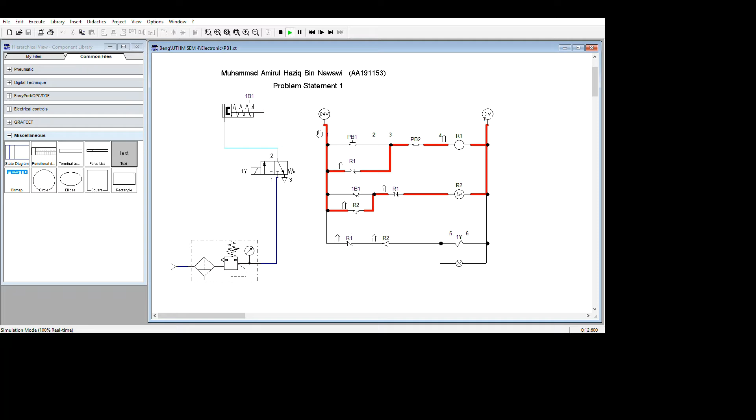So I run the simulation. When I push the push button, R1 energizes, so the lamp is on. After 4 seconds, the lamp will turn off, and the cylinder moves to its initial position. That's all for me. Thank you.

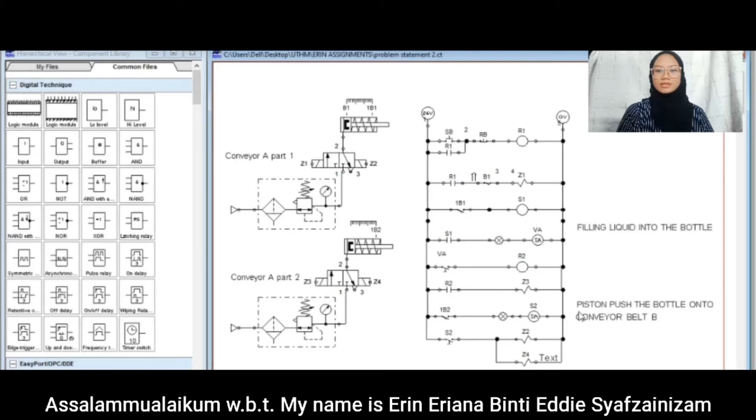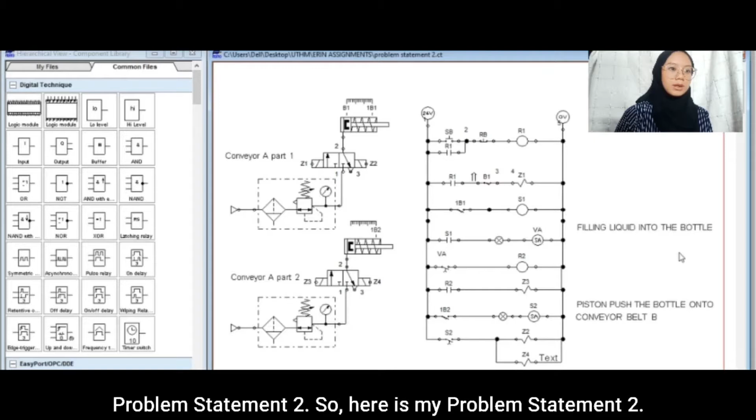So as you can see, here's my problem statement 2. There are two vertical rails, one is input and another one is output. The input is 24 volt while the output is 0 volt. There are 10 rungs, numbered 1 through 10.

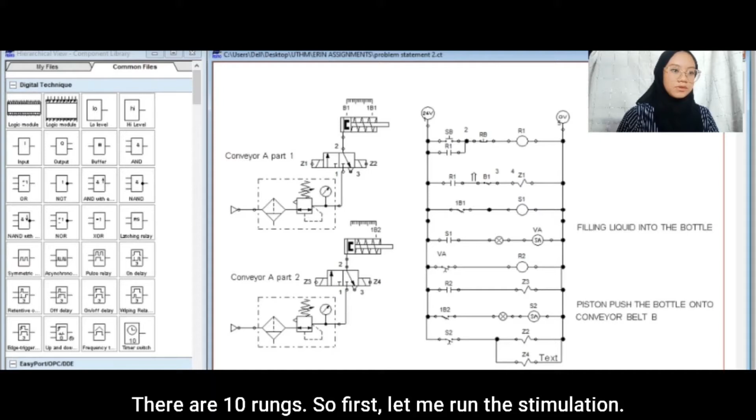So first, let me run my simulation. When we press the start button, the circuit of the conveyor belt will energize until the bottle stops at the filling station.

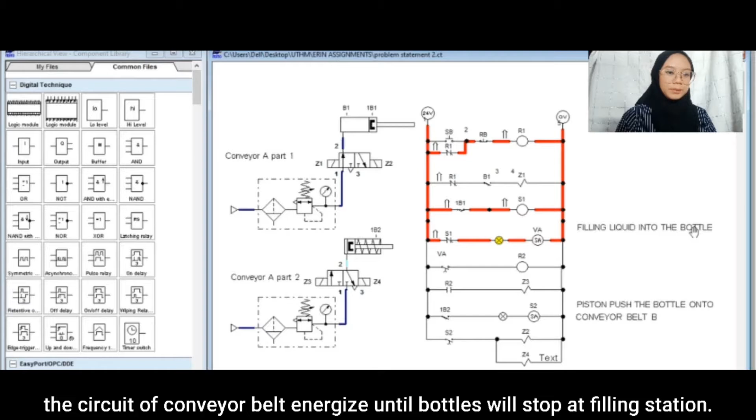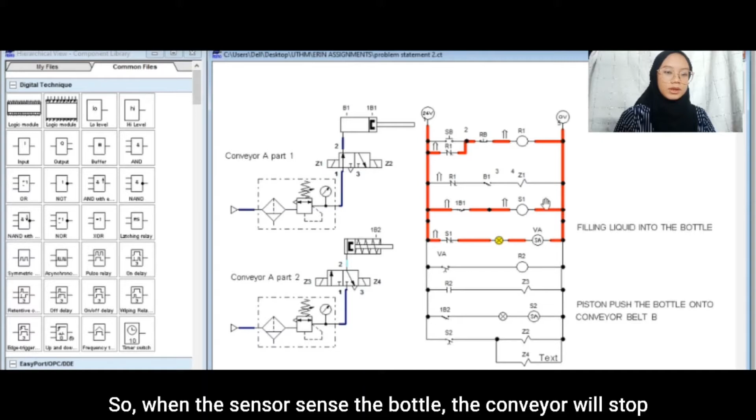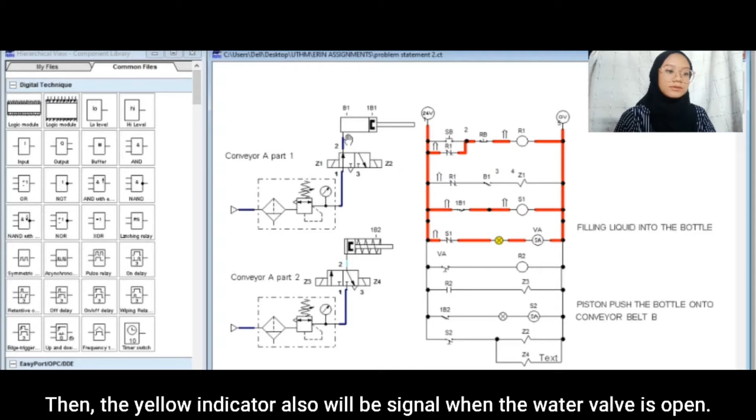When the sensor senses the bottle, the conveyor will stop and the water valve will open for 2 seconds for filling the liquid into the bottle. The yellow indicator will also signal when the water valve is open.

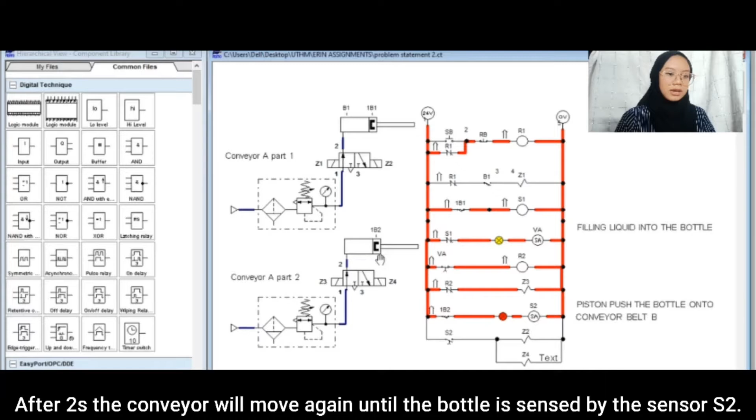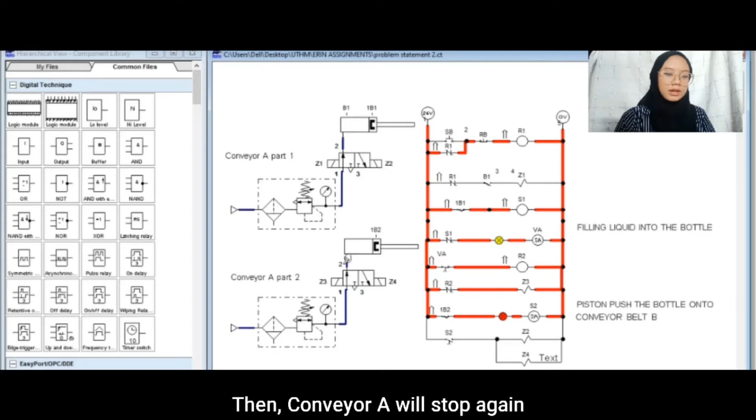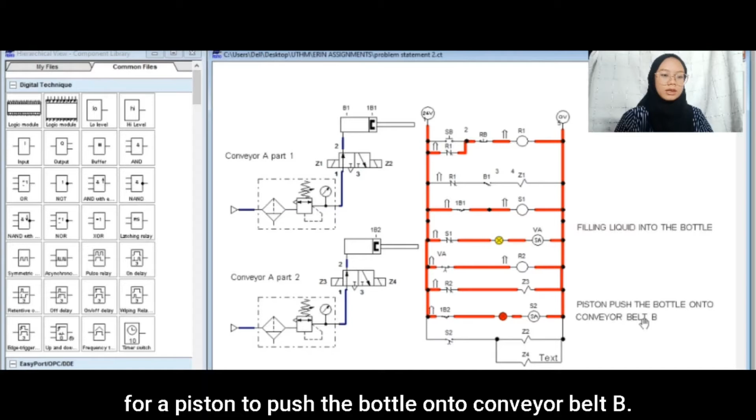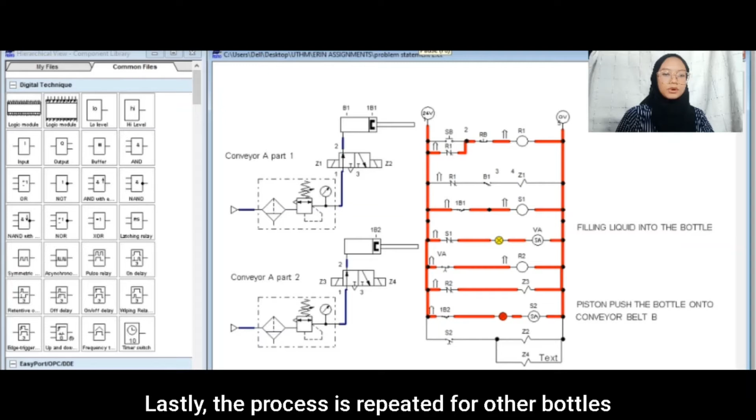Then the process is repeated. Lastly, the process is repeated for another bottle until the reset or stop switch button is pressed, which is this one. Okay, so that's all from me. Thank you.

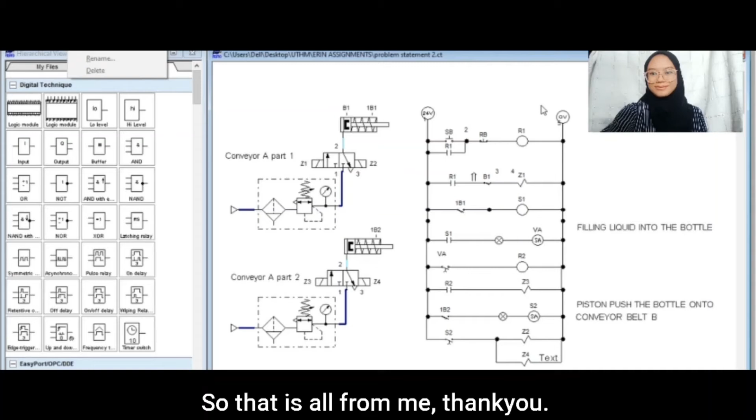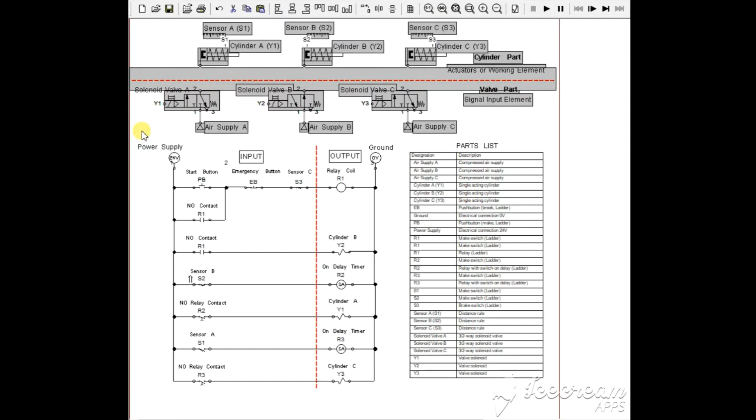This is the pneumatic circuit of the 3-cylinder system, and this is the ladder diagram of the 3-cylinder system. Meanwhile, this is the table for the parts list, which shows the components used in this system.

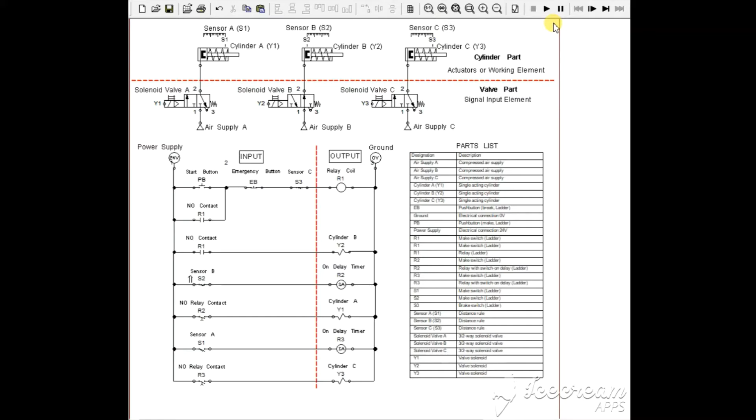In the pneumatic circuit, we have two different parts. The first part is the cylinder part, which is the actuators or working elements, and the other one is the valve part, which is the signal input element.

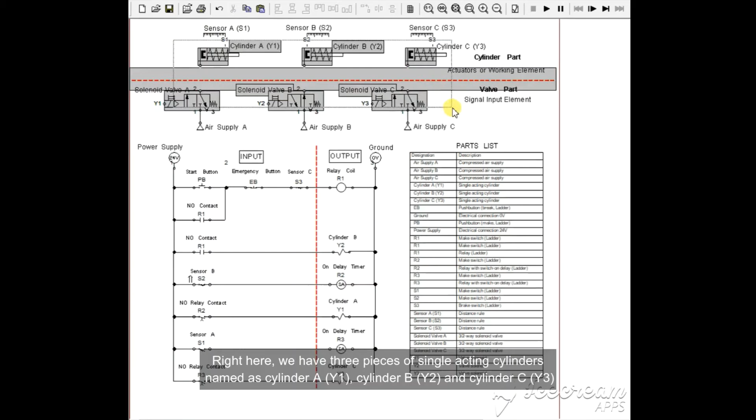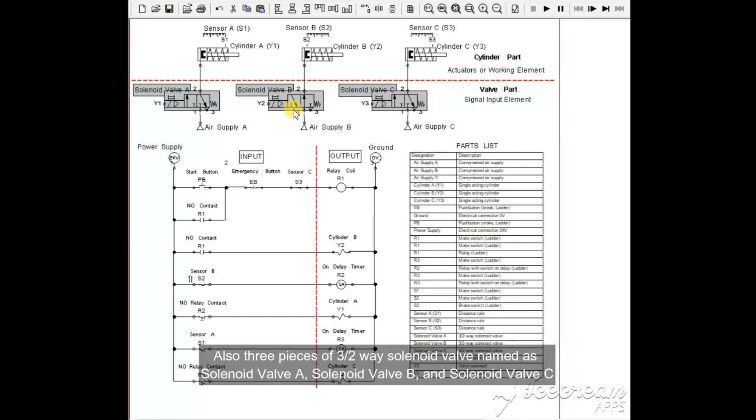Here we have three single acting cylinders named cylinder A (Y1), cylinder B (Y2), and cylinder C (Y3). Also three pieces of 3/2-way solenoid valve named solenoid valve A, solenoid valve B, and solenoid valve C. At the bottom, we have three compressed air supplies, named air supply A, air supply B, and air supply C.

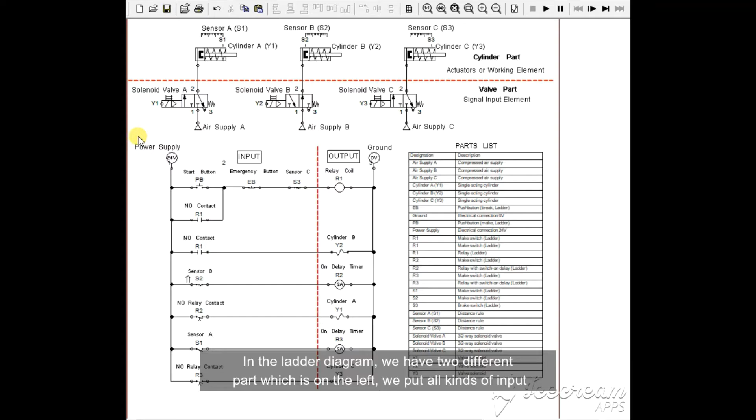In the ladder diagram, we have two different parts: on the left, we put all kinds of inputs, while on the right, we place all types of outputs.

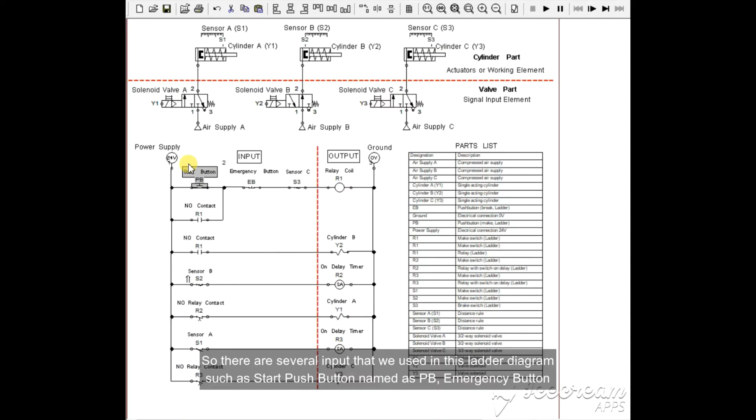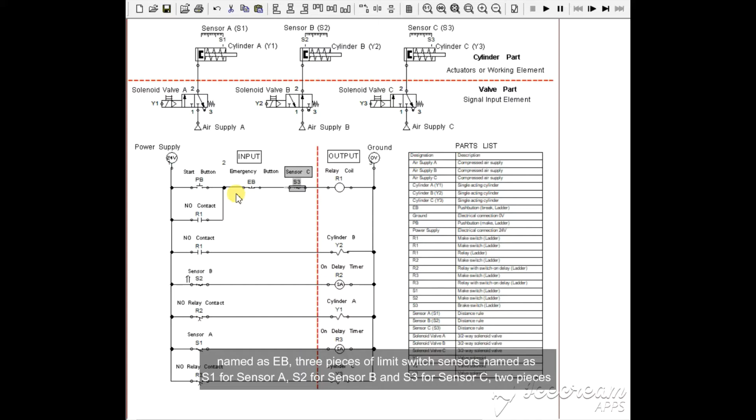There are several inputs that we use in this ladder diagram, such as the start push button named PB, emergency button named EB, three limit switch sensors named S1 for sensor A, S2 for sensor B, and S3 for sensor C. There are also two normally open contacts named R1, and two normally open relay contacts named R2 and R3.

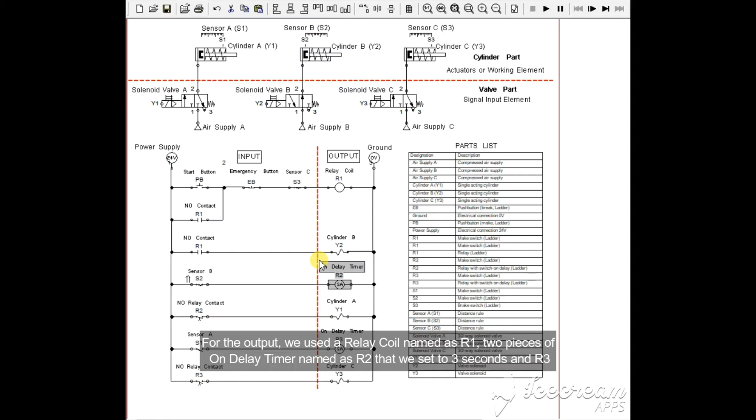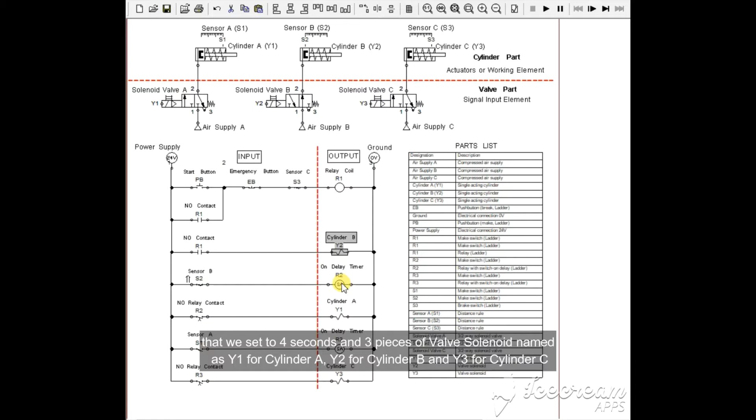For the output, we use relay coil named R1, two pieces of on-delay timer named R2, set to 3 seconds, and R3 set to 4 seconds, and three pieces of valve solenoid named Y1 for cylinder A, Y2 for cylinder B, and Y3 for cylinder C.

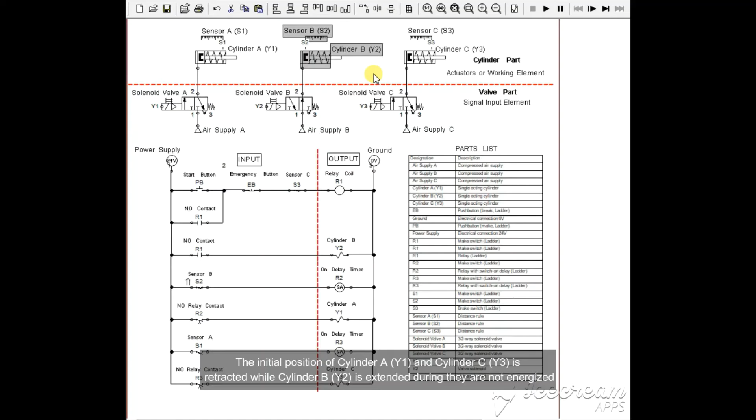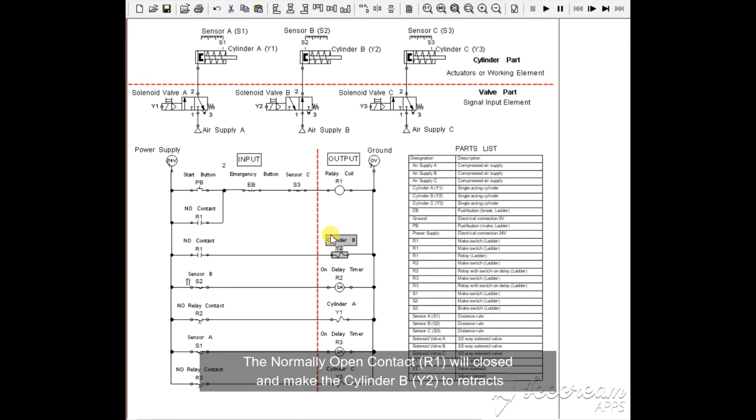The process sequence of this system was like this. The initial position of cylinder A, Y1, and cylinder C, Y3 is retracted, while cylinder B, Y2 is extended during when they are not energized. When start button PB is pressed, current supply will flow through the circuit and energize the relay coil R1. The normally open contact R1 will close and make cylinder B Y2 retract.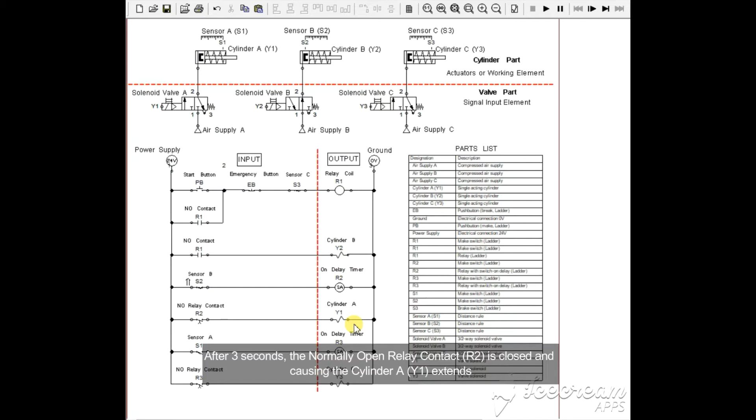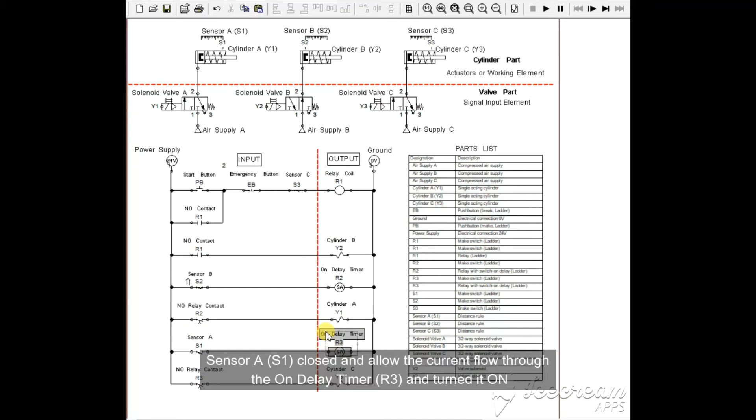When sensor B S2 detects full retraction for cylinder B Y2, current will flow through the on-delay timer R2 and turn it on. After 3 seconds, the normally open relay contact R2 closes, causing cylinder A Y1 to extend. When sensor A S1 detects maximum extension for cylinder A Y1, the normally open limit switch of sensor A S1 closes and allows current to flow through the on-delay timer R3, turning it on. After 4 seconds, the normally open relay contact R3 closes and makes cylinder C Y3 extend.

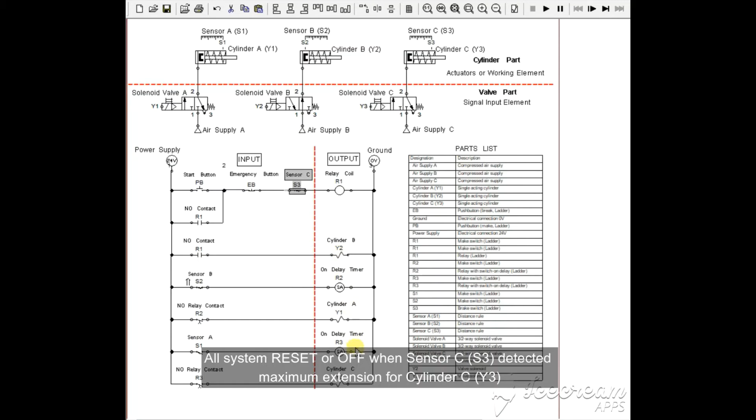All the system resets or turns off when sensor C S3 detects maximum extension for cylinder C Y3. The system will also be reset or turned off when the emergency button EB is pressed at any time during the operation.

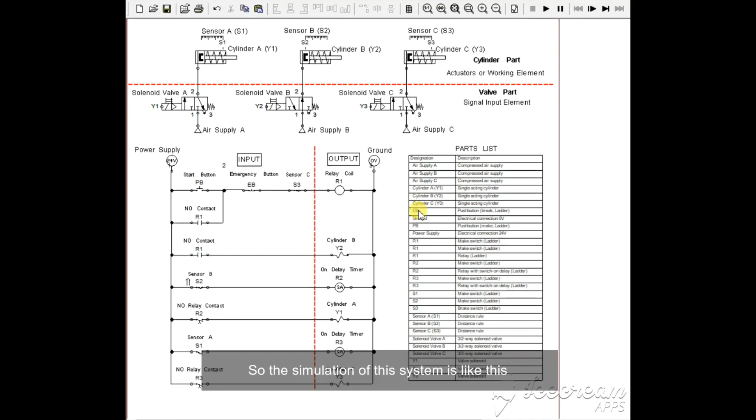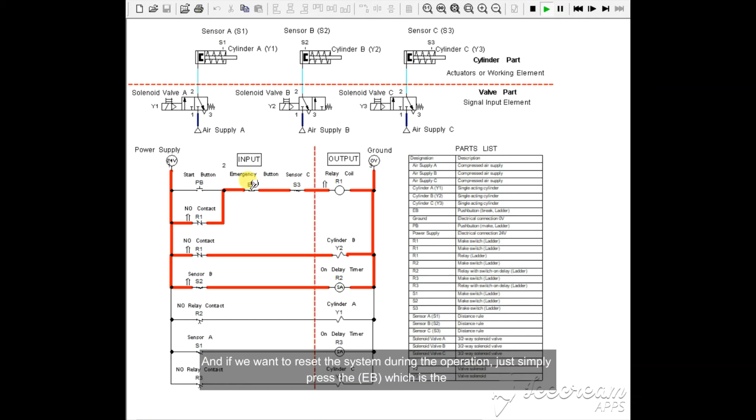So the simulation of this system is like this. Press the push button PB and the current will flow and affect all 3 cylinders. And if we want to reset the system during operation, just simply press EB, the emergency button, and the system will be reset or off.

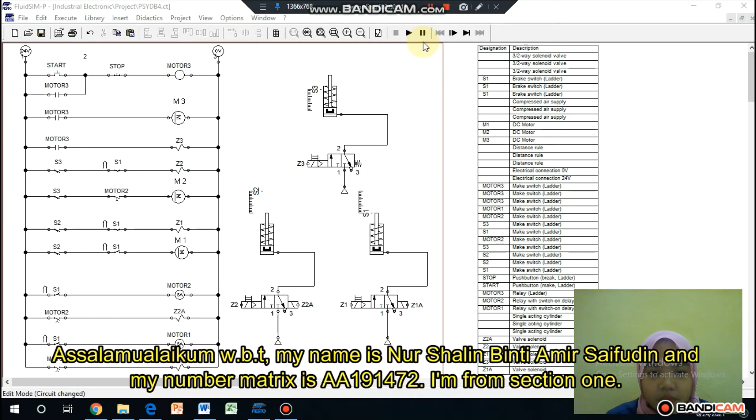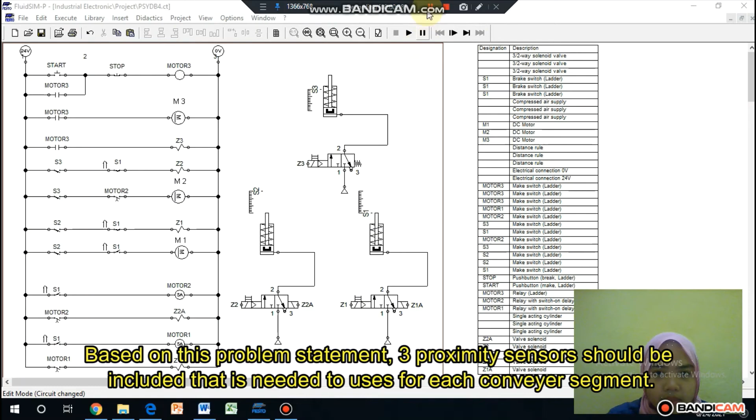Today, I would like to present problem statement 4, which shows the PLC CPM2A used to start and stop the motors of a segmented conveyor belt. Based on this problem statement, 3 proximity sensors should be included that are needed by the users for each conveyor segment. This is a ladder diagram and electropneumatic circuit that shows how the motors and sensors operate when they detect objects.

When the start button is pressed, 24 volts of voltage supply is applied in this electropneumatic circuit. The current flows through the DC motor M3 and starts the operation. Then the relay coil motor 3 will begin to energize. When it's fully energized, motor contact 3 will close.

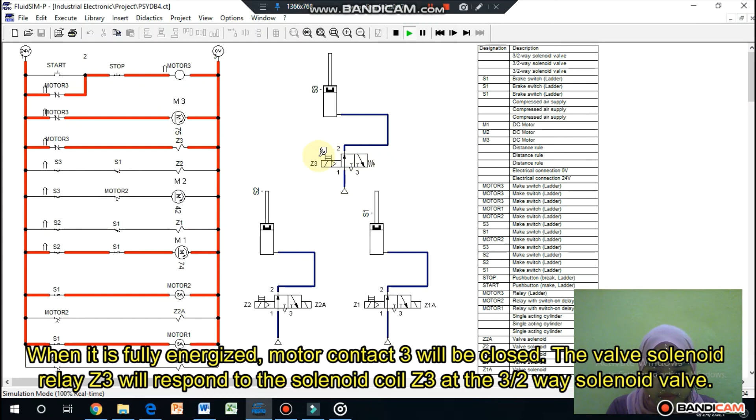The valve solenoid relay Z3 will respond to the solenoid Z3 at the 3/2 way solenoid valve. Hence, the valve will automatically push to the right, so motor 3 will turn on. Motor 3 will always stay on unless the stop button is pressed.

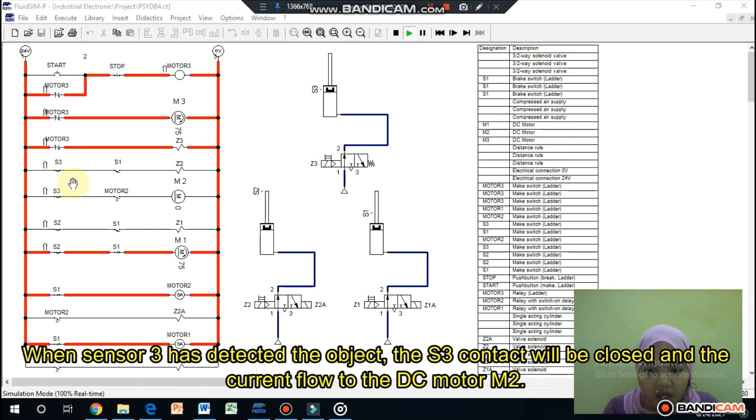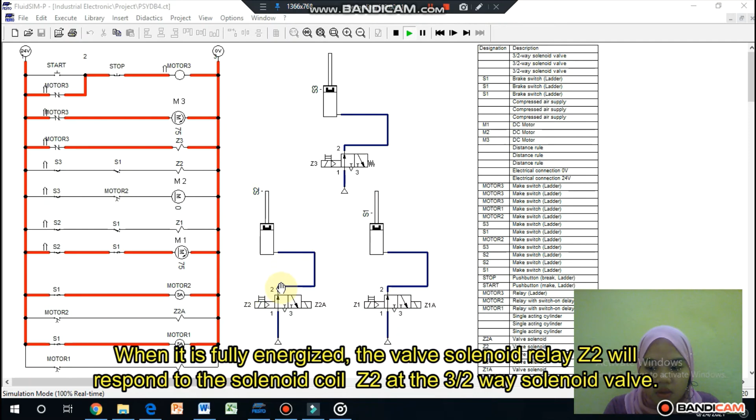When sensor 3 has detected the object, the S3 contact will close and current will flow to the DC motor M2. The DC motor M2 will turn on and start operating. Then the valve solenoid relay Z2 starts to energize. When it's fully energized, the valve solenoid relay Z2 will respond to the solenoid coil Z2 at the 3/2 way solenoid valve, so the valve will automatically push to the right and start to operate.

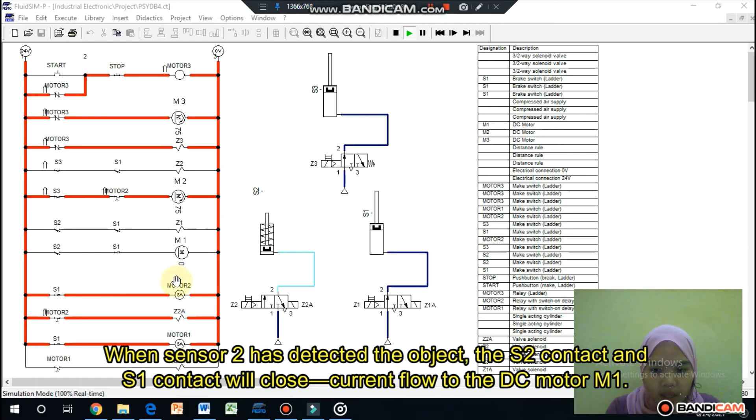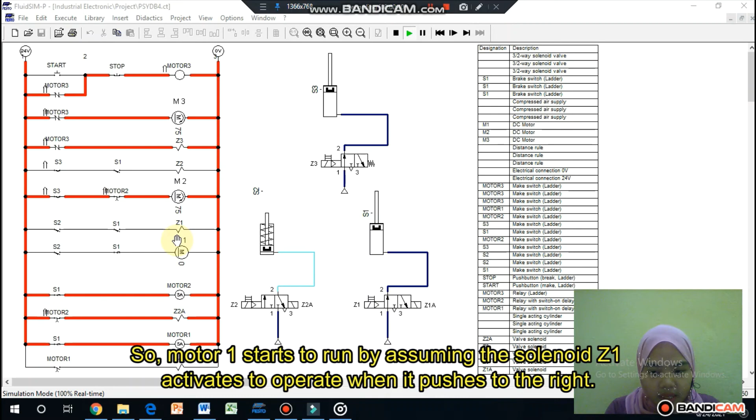When sensor 2 has detected the object, the S2 contact and S1 contact will close, and current will flow to the DC motor M1. Then the valve solenoid relay coil Z1 will start energizing. When fully energized, it will respond to the solenoid coil Z1, so motor 1 starts to run, assuming the solenoid Z1 activates to operate when it pushes to the right.

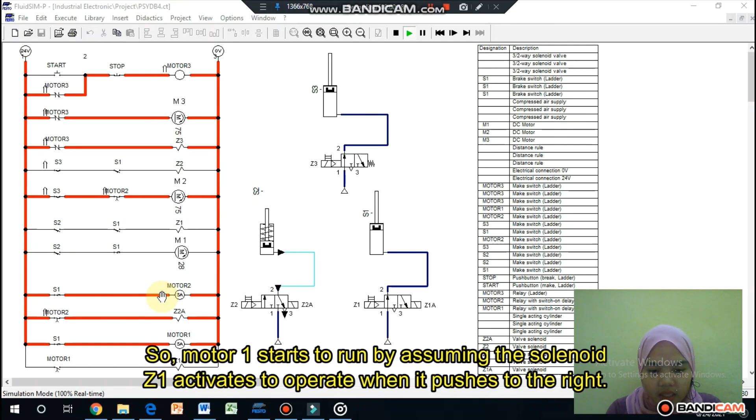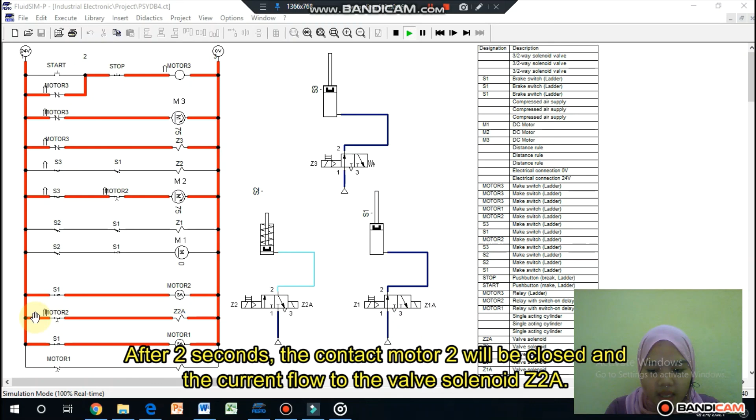When sensor 1 has detected the object, the S1 contact is already closed because motor 1 has turned on. At the same time, current flows through the relay with switch-on delay coil motor 2 and starts counting for 2 seconds. After 2 seconds, the contact motor 2 will close and current will flow to the valve solenoid Z2A, so motor 2 will turn off, assuming the valve solenoid Z2A responds to the solenoid coil Z2A and pushes it to the left.

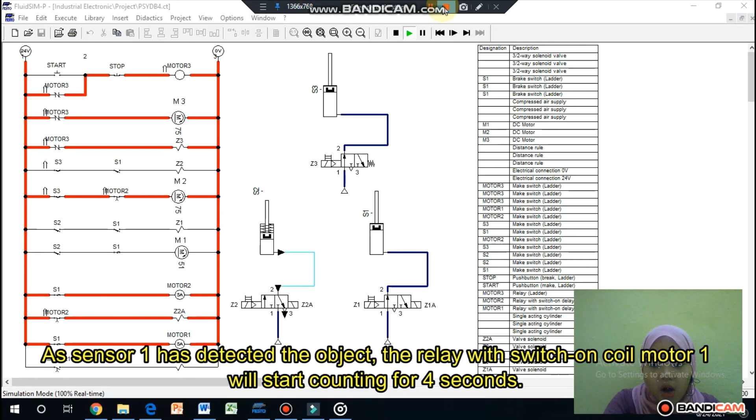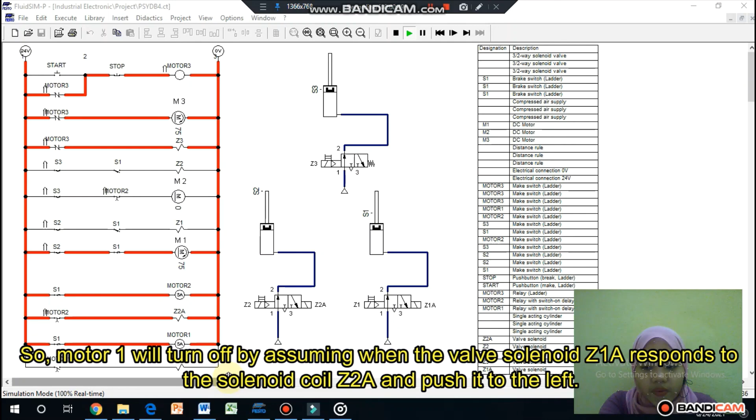As sensor 1 has detected the object, the relay will switch on coil motor 1 and start counting for 4 seconds. After 4 seconds, the motor 1 contact will close and current will flow to the valve solenoid Z1A, so motor 1 will turn off, assuming the valve solenoid Z1A responds to the solenoid coil Z2A and pushes it to the left.

This circuit will operate until the stop button is pressed to stop the current flow through the circuit. Okay, that's all from me. Thank you.